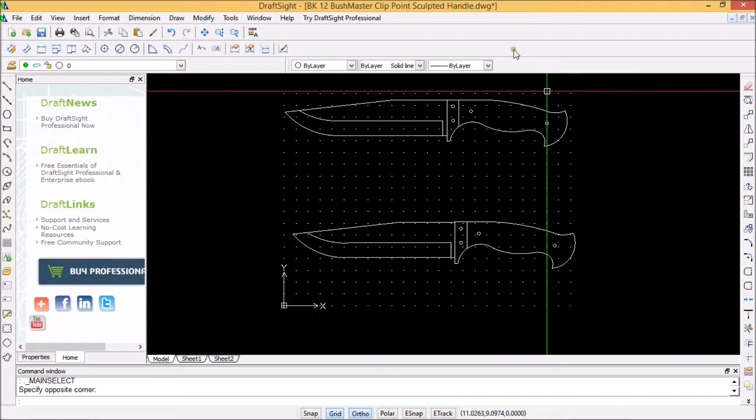Let's start clear from the beginning. I'm going to take the finished knife that shows the blade bevel on it, the bolster area, the pin attach holes, as it would look as a completed knife. Then what I'm going to do is turn it into a water jet file with a skeletonized handle.

Alright, so what I'm going to do is drag a box around the knife, and that selects everything in the box. I'm going to copy everything in the box, and I'm going to just paste it down here so that I can work on it.

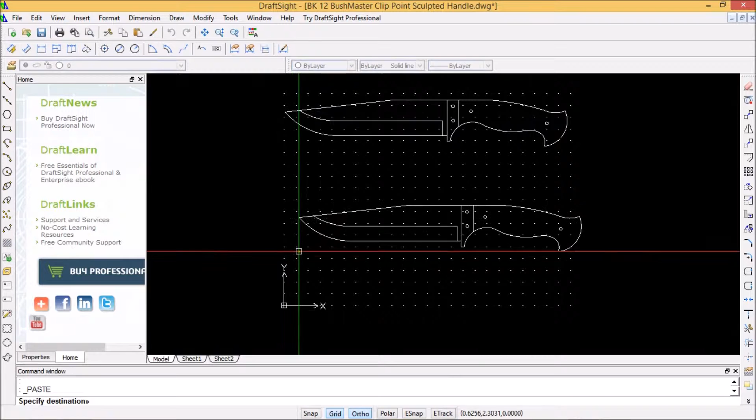Alright, I don't want the water jet to cut this line, because that'll cut that chunk right off, so I'll delete that line. I don't want that line on there. Delete that one. I don't want this line on there.

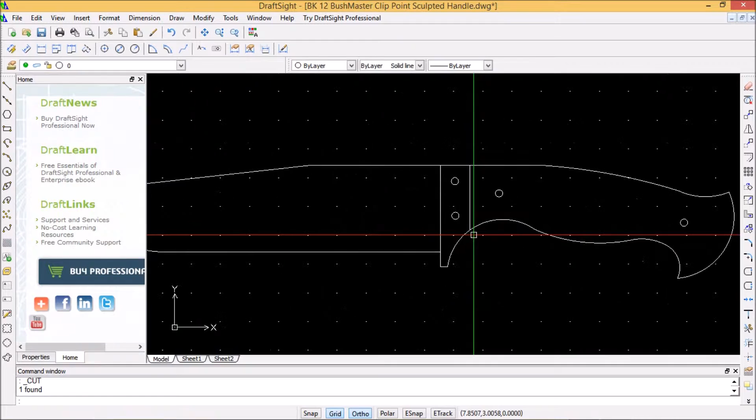I'll zoom in a little bit with the track mouse, and you can push down on the mouse button or on the track wheel button, and that will grip it. I don't want the water jet to cut here. Okay, I don't want it to cut here either. Get rid of that. Alright, let's look at that.

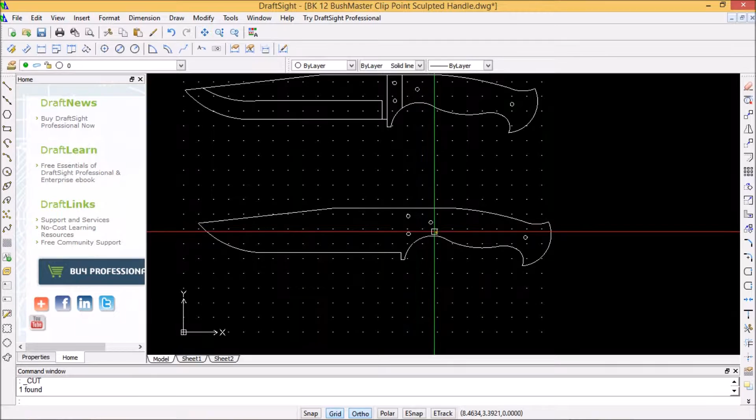So now what we have is a profile that the water jet can cut. It'll cut all the way around the outside, and it'll cut those holes inside. Now what I want to do is skeletonize the handle for weight, to improve on the weight.

So I'm going to start out with a line right here, about that much. Hit escape.

Let's see, I'm going to make me an arc. Come over here and select that. I'm going to hit E-snap just to make it easy for me, and then it jumps right on the end of that line. I come down here to about the midpoint, and then pull that around.

Actually, I'm going to stop on this one. I'm going to stop that right there. I want to get that far down in the corner.

On this one, I'm going to do the same thing. E-snap is still on. Got the arc, go to the end point. I'm going to come right about there. And then we'll go on up like that. Hit escape to exit that function. There we go.

Now what I'm going to do over here, I'm going to take the arc again, and I want to start right at the edge of that circle, right up about that high. I'm going to come out to the middle of that circle, just eyeballing here, freehanding, and come back around right about there.

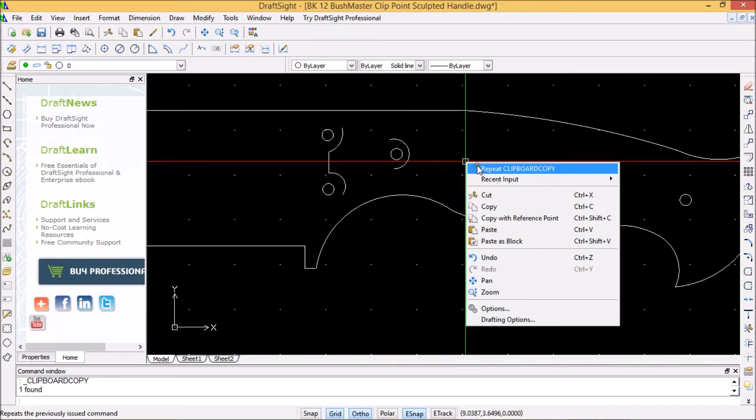Right there. I'm going to copy that. I'm going to paste it over here so I can use it later, so I don't have to keep reinventing these things. Alright, let's put this one back where it came from.

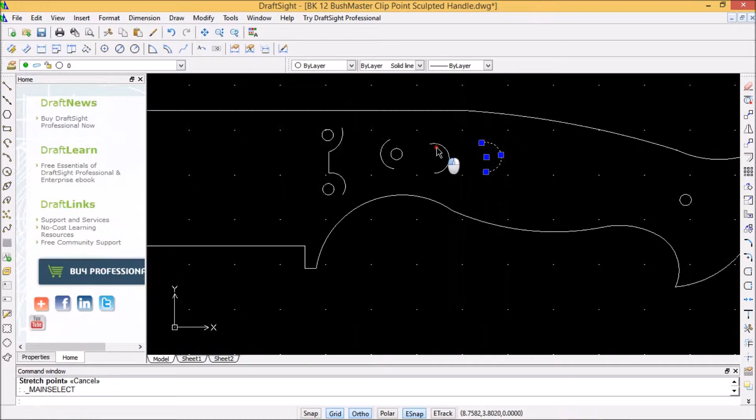Okay, we'll hit escape to clear up everything. I'm going to bring this one back over. I changed the size a little bit when I was grabbing it. Oops, let me exit, escape I mean. Alright, I got to grab it over here on the line, I guess. Alright, I'll adjust the shape here in a bit.

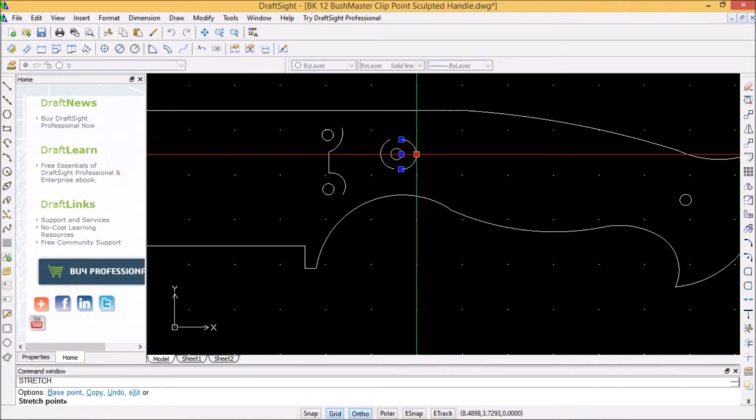There we go, I'm going to bring this in some. Let me turn this E-snap off. E-snap is handy, but it also doesn't work for freestyling. I'm going to bring that in about there. Escape, see how it looks. I'm happy with that.

Alright, now what I want to do is take another arc. I'm going to put the E-snap back on, snap onto the end of there. I'm going to come in here, follow this contour of the profile up a little ways, and then go up and snap onto the bottom of that.

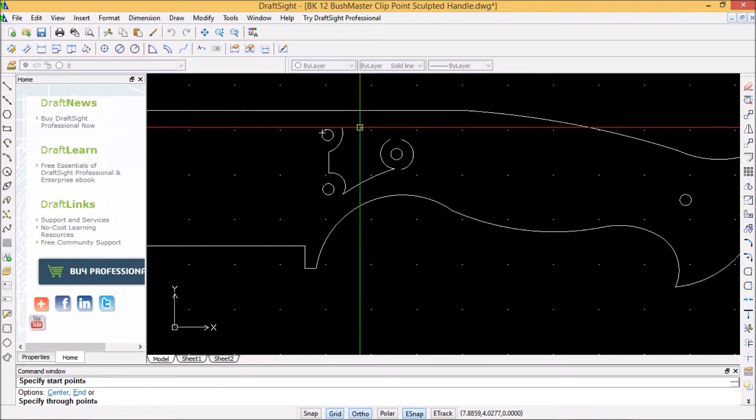I'm going to get the arc again, got from that one. I'm going to come out here a little ways, about midpoint I think, and then I'm going to bang down to that.

Alright, it's looking pretty good so far. Now we'll make a long one that goes out this way a bit, following along the handle, and I'm gonna stop right about there.

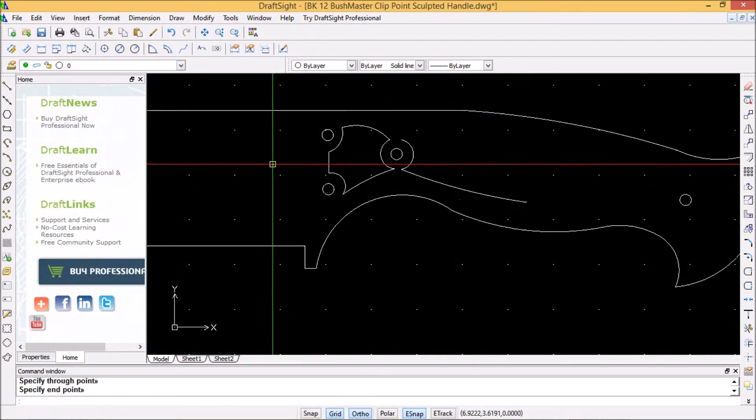Alright, now what I'm gonna do is come here and doctor this up a little bit. I don't quite like it that way it looks that sharp. So we select both these lines and edit them, and I'm going to bring that more like this.

I'm going to edit down here, so I select that line. Oops, there we go. Oh, that one wants to fight. Let me turn that snap off. Alright.

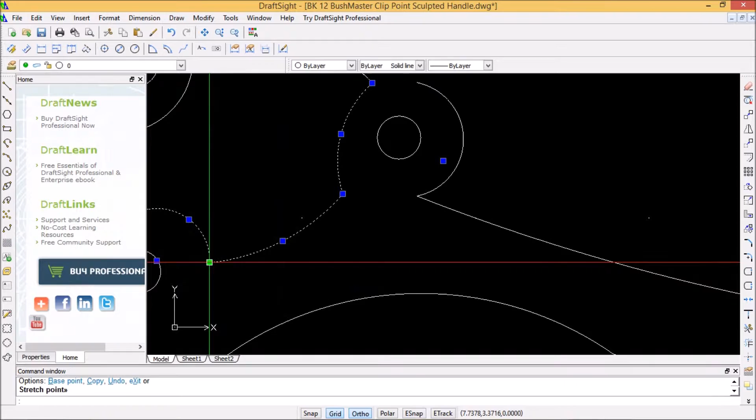I'll do more like that. I'm okay with that one. That looks okay. Actually, I'm going to change this a little bit more. Bring it in up there.

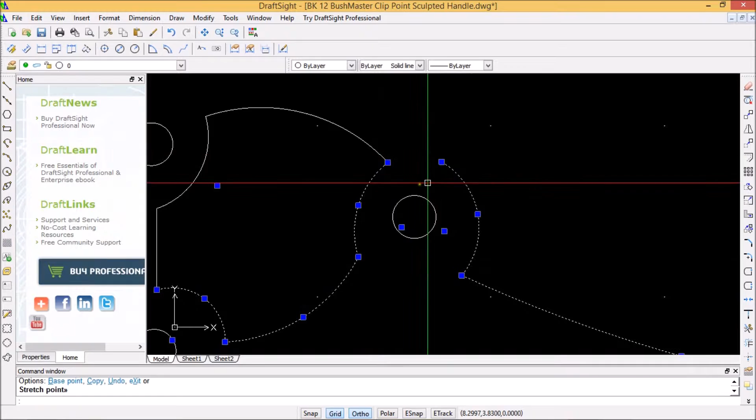And this one here is going to bring it out a bit there. Open that one up a bit. Alright, hit escape, see how that looks. Okay, that's looking good.

Oops, I'm still kind of clumsy with this. Alright, I'm going to use the arc again. I'm going to turn the E-snap function back on. Jump on there, go up towards the top of the handle, and run down the handle a little ways. Let's see.

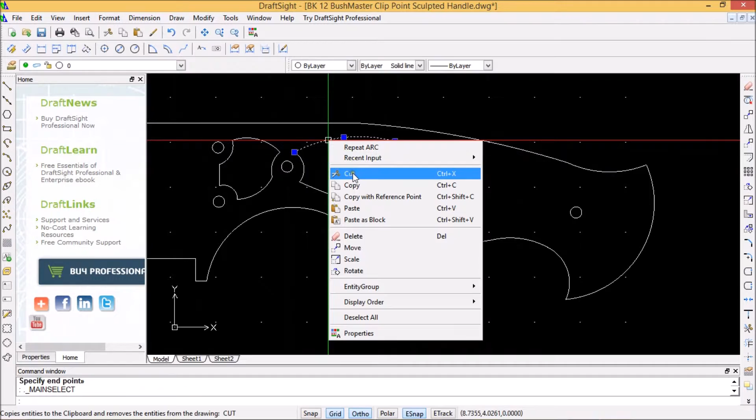I want that to be thicker, so I'm going to change. I'm going to delete that. Oh, I couldn't. Let's see. Alright, E-snap there. Go up this way.

Actually, I'm going to stop right about here and put one bar in. Let's do an arc here, down to there. I'm going to do another one over here.

Just from there, down to there. Alright, got another arc, I'm using the arc and the E-snap pretty much is all I'm doing. I'm gonna put one, select about a midpoint there, bring that down like that.

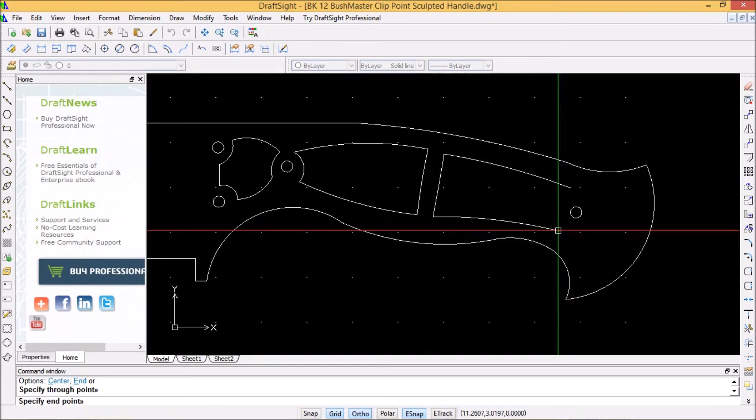Use another arc, click on there, click right about here. And I think I'm gonna go right there. Okay. Now I'm gonna use the arc again.

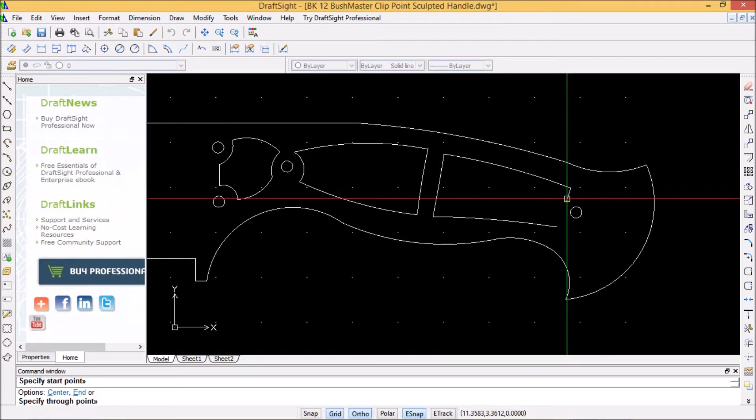I'm gonna actually come over here and start. Actually, I'm gonna go ahead and start right here, come down to here, midpoint on the circle roughly, and then finish down there. All right, now let's doctor this a little bit.

I'm gonna leave that like that. I like that. Okay, select the arc again. I'm gonna come over here to the other side of this rear pinhole. Select a point there, select a midpoint, and select an end point.

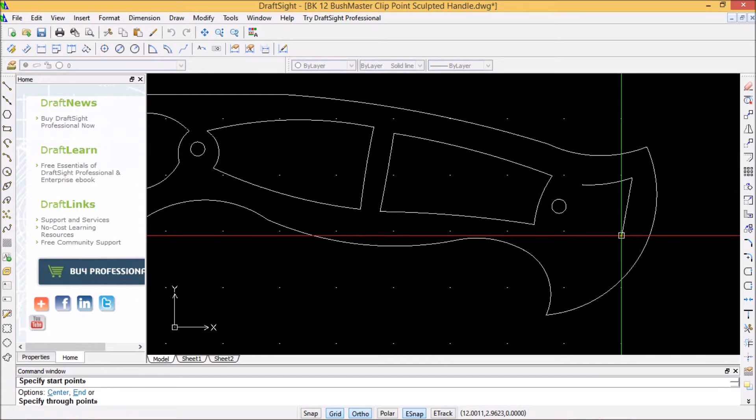Use the arc again, I'm gonna snap on the end of there like that. Oops. Select a midpoint. Back over here and select the end point. Okay, I'm using the arc yet again. Start there, I'm going to come up right about here.

Nose like that. Use the arc once more. Click onto there, I come down around about the bottom of that circle. Make this corner, come in like that.

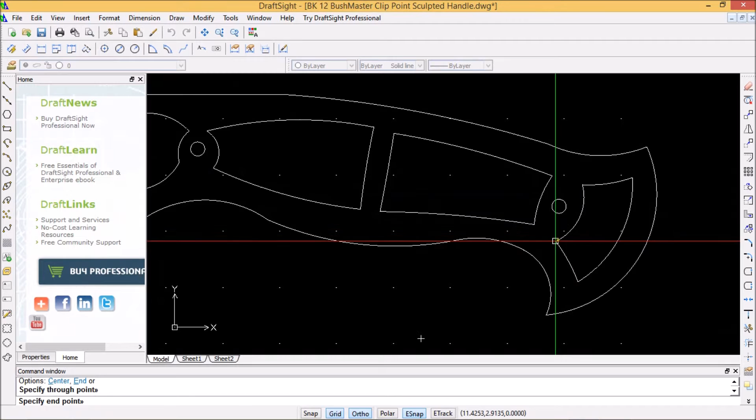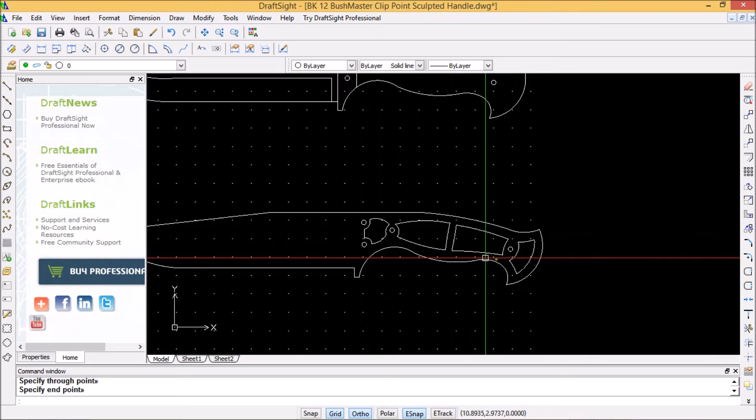Alright, so now I've skeletonized the handle of this. And what's going to happen is the water jet will come in, it'll cut the holes, it'll cut all this skeletonized material out, so this area will be cut out, this area will be cut out, this area will be cut out, and it will leave material for the holes. This will have a stiffener piece going across there, and this will have a piece going across there for strength, one more piece right there. And so we can lighten the handle on the water jet.

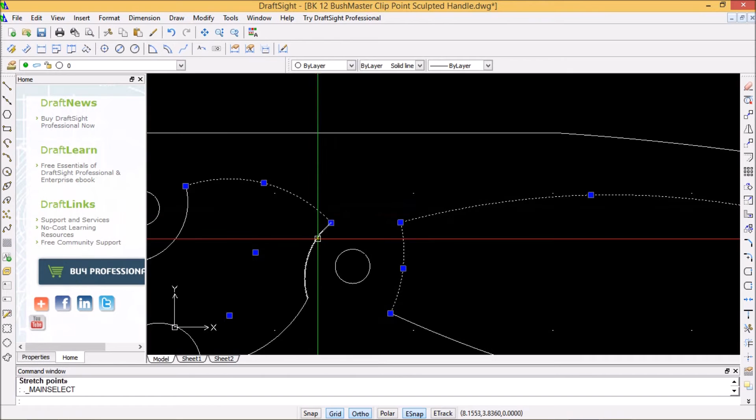Let me get rid of this. I'm not real happy with the way that looks, so I'm going to soften this up a bit. I had something else in mind when I started there, I think, and it just didn't look the way I wanted it to. So I'm going to soften that up.

Let's hit escape, take a quick look. I'll drag it over. And so there, I can send that to the water jet now, and it will cut it out just like that. I don't have to go and drill a bunch of holes in anything to lighten it up. It's already skeletonized. Then I can put the scales on there.

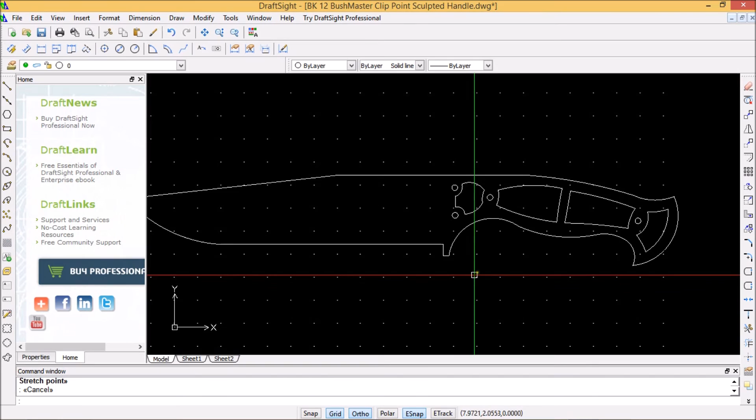I'm really excited about this DraftSight program that I've been learning on.